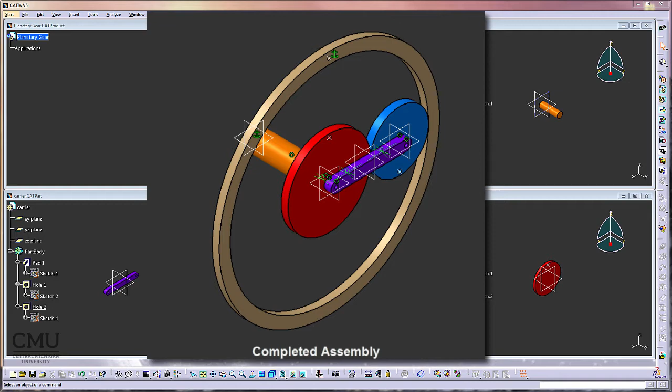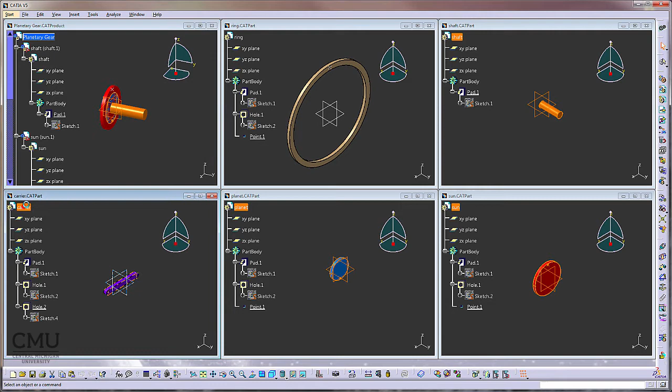the shaft, which will be the major axis for the sun rotations. Then I'm going to start adding other parts as well: sun, planet, carrier, and ring.

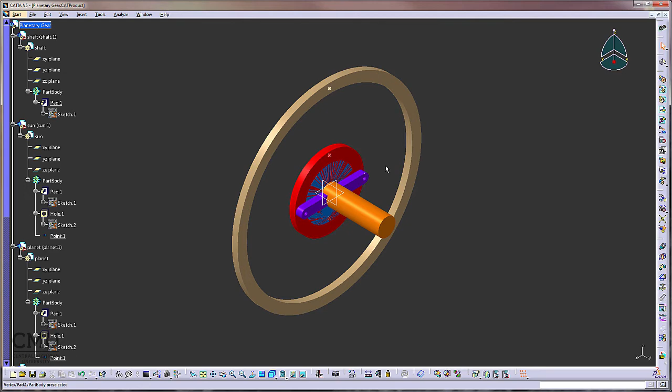Alright, to see a better view, I'm going to keep this angle. So I'm going to send the axis a little back, and fix the ring. The ring will actually represent the internal gear. This side will be gear, and there will be sun and planet linked by the carrier, and I will send the axis to the back, so they line up at the back of the sun.

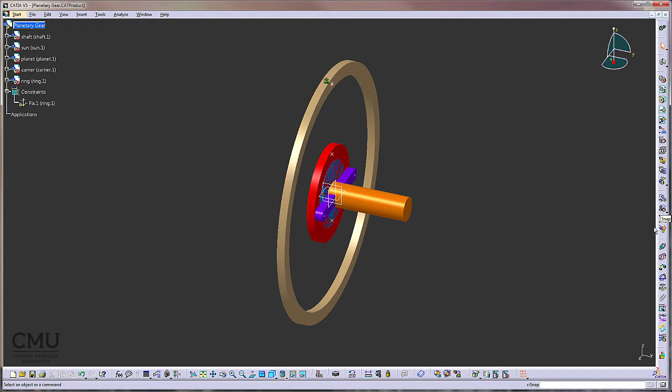So let me start with fixing the ring. Okay, ring is fixed, and I'm going to make this face coincident to this face.

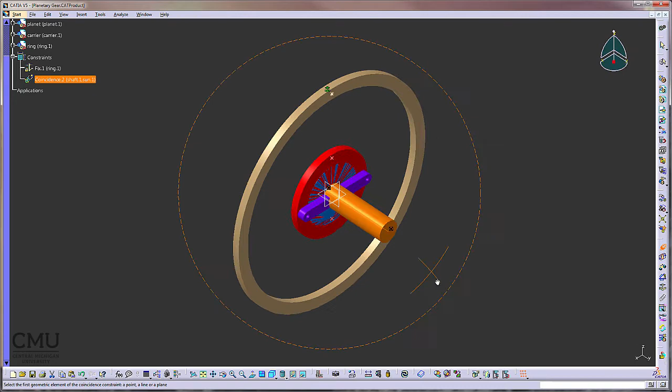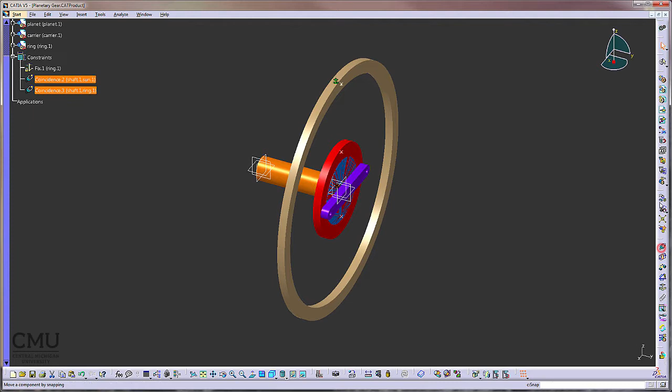Then I am going to make this face also line up with this face, so they are about the same level. If I update now, you can see they're not actually coincident between axes yet, so we'll fix that soon. Let me manipulate the planet up. We'll fix it later.

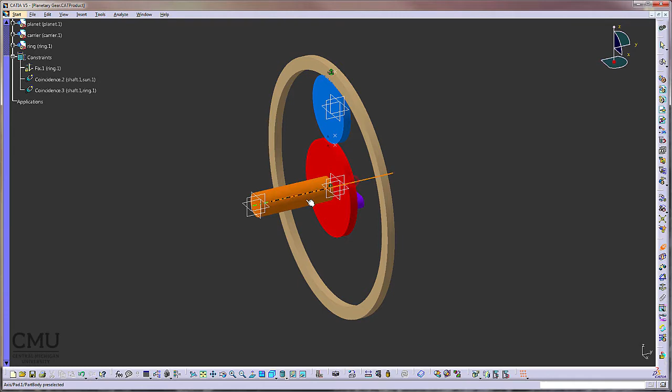So then, axis of sun, axis to axis. And now the sun should be able to rotate.

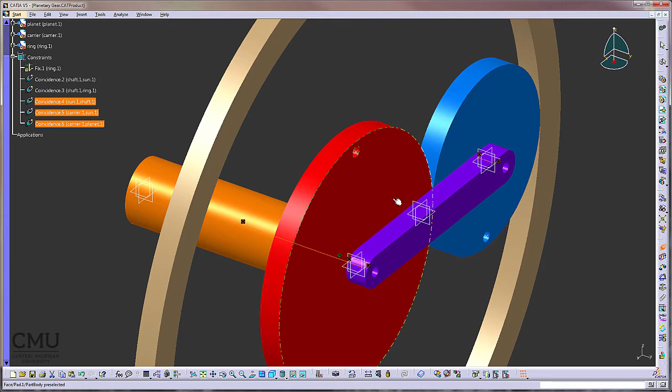Then for the sun and the carrier, I am going to make one axis align with the axis of the sun, and the other side of axis align with axis of the planet. Axis to axis, and axis to this axis. If I update it now, it's already in a pretty good position. I haven't added coincidence between those two yet, but the way the geometry was made, it's already lined up, so it should be good to go.

Alright, then let's jump into kinematics. So we're going to go to DMU kinematics.

As I mentioned, we're going to fix this ring and axis. In this moment, you don't have to have fixed parts in the assembly -- you can choose another part as your fixed part. So, new mechanism, then I'm going to fix the axis. The ring and axis should be in stationary positions, so the sun and planet rotate based on these two ratio differences. I'm going to put a rigid joint between axis and ring, so they're not going to go anywhere.

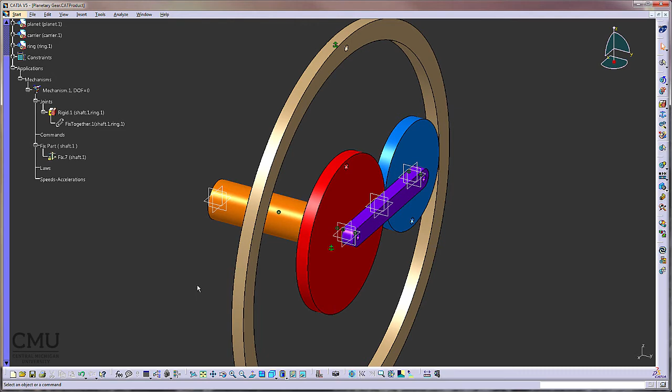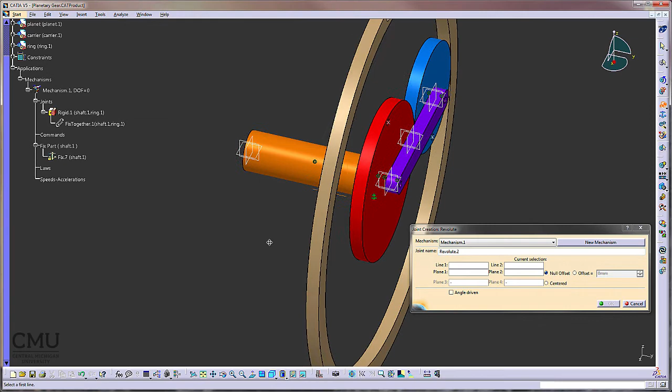Then we're going to have a very simple revolute joint here, between sun and axis. Then we're going to make a revolute joint between sun and carrier, and the same way a revolute joint between planet and carrier. So, revolute joint: axis, and plane -- I'll hide and use this plane.

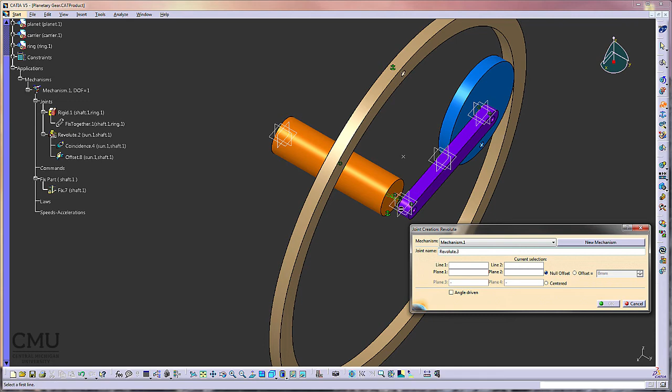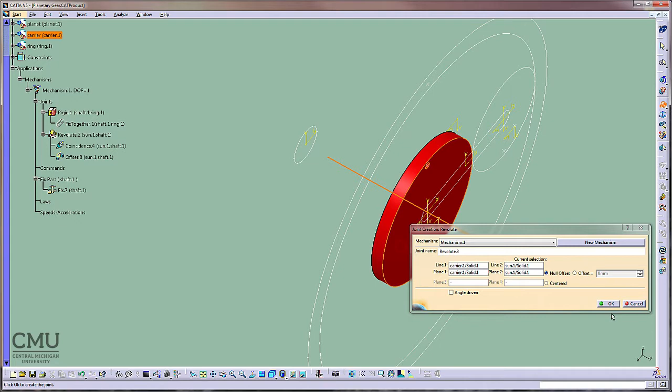Another one between carrier and sun. So axis -- I'm going to go to Hide/Show, axis, and plane, which will be the back of the carrier where it touches the sun. Then I can go to Hide/Show, and pick up the face where the carrier touches. Okay, so I can bring it back.

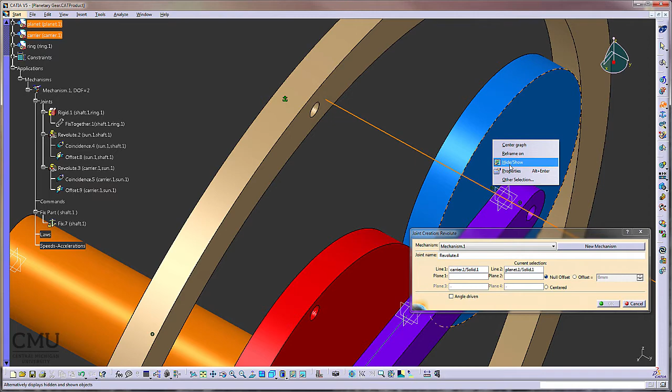And another revolute joint will be between planet and carrier. So axis, and I'm going to hide the plane, go to Hide/Show, and select this plane.

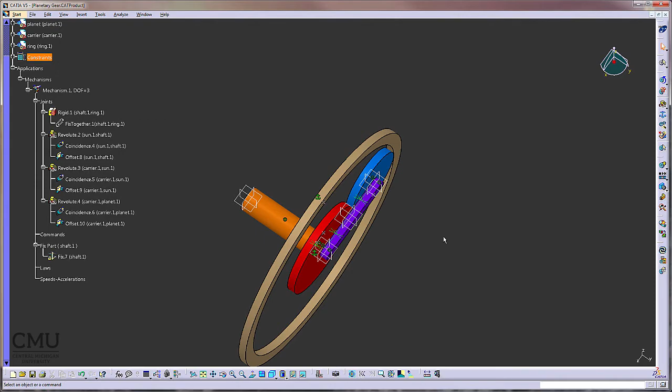So now, so far I've made 3 revolute joints. Again, the sun is rotating based on the axis, which is already fixed, and the ring was rigid, so it's not going to go anywhere. Another revolute joint between carrier and sun, and another revolute joint between carrier and planet. Now, with the assumption that all geometry is made properly, as you can see in the front view -- let me hide this one for you.

You have to make a single point contact between two curves if you want to create the roll curve joint, which is this one, the roll curve joint. We're going to use this joint to simulate a gear mechanism. Same way, the internal gear from the ring part and this planetary gear, the planet gear, will actually have a single point. So again, it's important to understand that to create a roll curve joint, you have to make a single contact point.

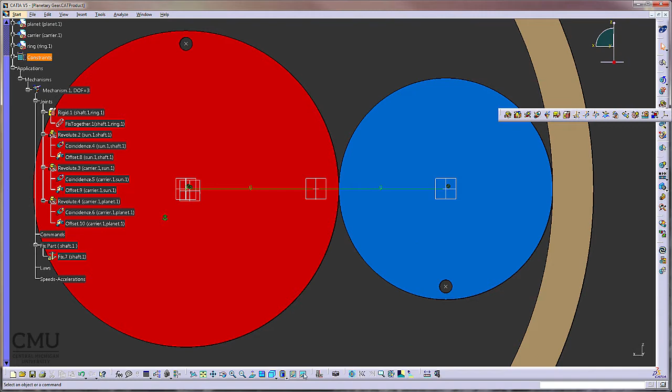So let me bring it back to the carrier. As you can see, based on the joints so far we have 3 degrees of freedom -- that makes sense: the sun is free to rotate, the carrier is free to rotate, the planet is free to rotate, and the rest is fixed. So we're going to make a relationship between this curve and this curve as a roll curve, and again this curve to this curve as a roll curve.

So let's find out what kind of degree of freedom we're going to have. Roll curve: first curve, sun; second curve, planet. Okay, so we have the first one, then the second one between planet and the internal gear. And now we have our degree of freedom.

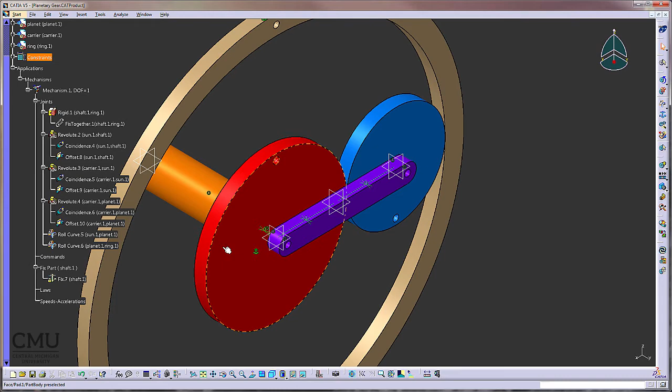With the assumption that the sun will be linked to a motor -- let's say it's a pinion -- then by rotating this, it should cause rotation of the planet, and that should cause rotation in orbit of this planet by the internal gear, which should cause the carrier to spin. So the axis of this carrier here will actually be the output, and the input will be rotation of the sun.

So our input, the actual command, will be the revolute joint of our sun based on the shaft. We're going to make it angle-driven, and rotate a perfect 360 degrees. But as you can see, because of diameter differences between planet and sun and planet and internal gear, there will be dramatic changes. So let me rotate it about 4 times, so 4 multiplied by 360 degrees -- the sun will rotate 4 times. Then we're going to find out how many rotations the planet will make, and how many rotations the carrier will actually make.

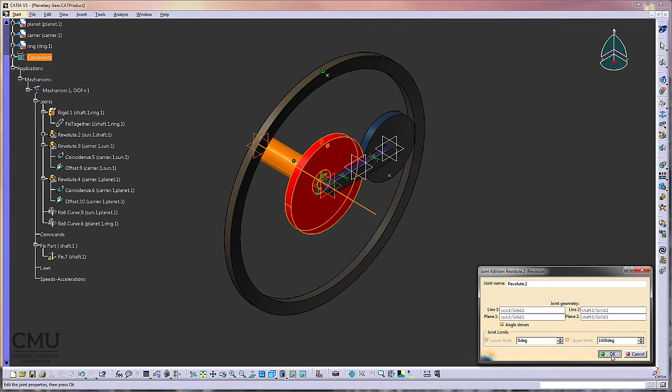So as soon as I say okay, the system, this mechanism, can be simulated right away. Let's see the mechanism -- 4 times the rotation of the sun. Then you can see the planet is rotating, and due to that, you can see the carrier is rotating as well. Okay, so insert.

So if I get rewind, there we go. So the carrier is making a little over 1 revolution for this full rotation of the sun.

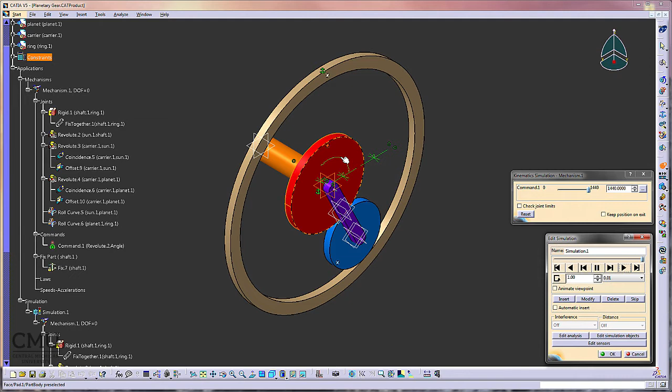Keep in mind, if you now put a law for the mechanism, if we spin that at, let's say, 10 RPM, then 10 multiply by 1 minute per revolution, 1 revolution, that is going to be RPM. Or you can say 360 degrees divided by 1 minute. It will again be 10 RPM in the case. Same thing, then I can add the kinematic time so that we have the same units for both lines.

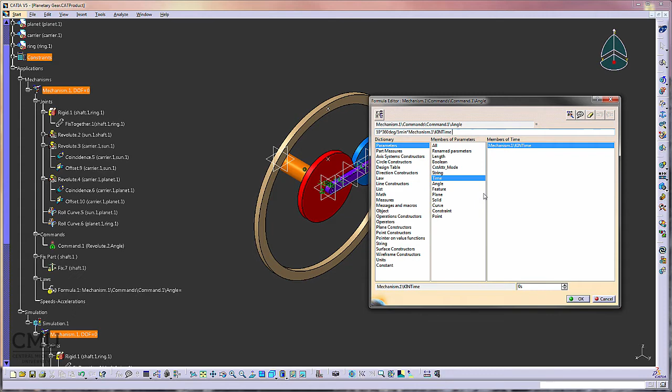Then say OK, so 10 RPM, the sun will rotate at 10 RPM over speed, and let's find out what kind of speed we will get for the carrier.

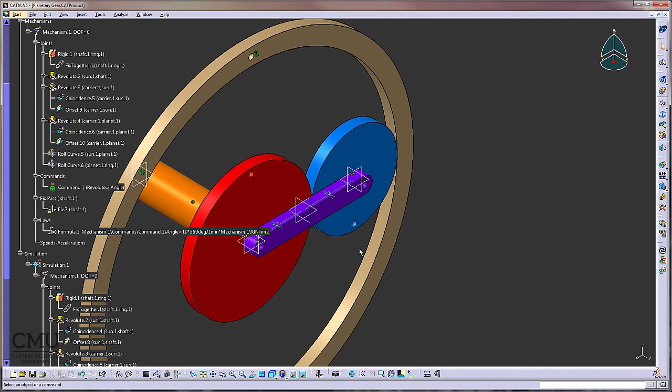So we're gonna add a sensor on the sun and on the carrier here, right there, and also add the planet. But one thing I'd like to mention is the axis we're checking the rotation of the planet shouldn't be based on the main axis. It should be based on its own axis in that case. So keep that in mind.

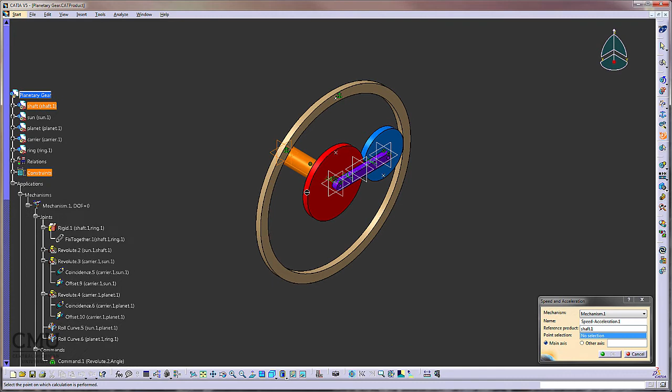So we're gonna add a sensor for the sun. The base reference will be, let's say, the shaft, which is a fixed one. Then for point of selection, we're gonna use the center origin point of the sun from the sketch in this case. There we go. So we're gonna keep checking based on the main axis in this case.

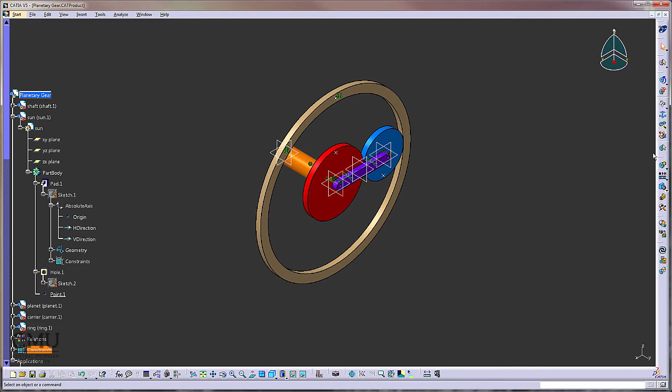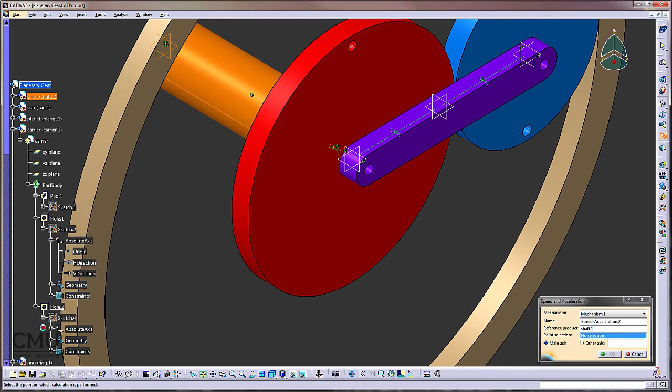First sensor is done. Second sensor will be added to the carrier right there. So we need to find out the speed of output. The shaft will be used as a reference. Then I need the axis to the origin, or if I had the reference point of the carrier—I don't think I have that point here. Since my origin is right here, I need to find the center of this hole. Is there a way we can find it? Again, the sensor position should be the center of this hole, which is actually my second hole in the carrier.

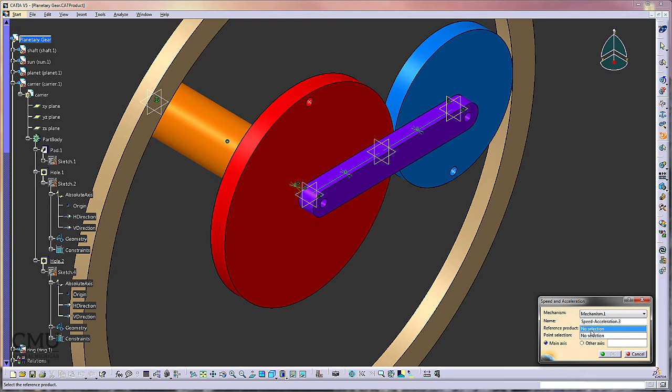So I'm going to use that so I can track the rotation. Same thing, another sensor goes to the planet. The sensor reference will be—that's the major point here. Now our reference is not the axis anymore because the planet will make a move, but I want to see based on this axis how quickly the planet is moving. So actually the reference will be the axis of this carrier. So with that fixed carrier, as the carrier moves, the planet moves, so then the point we are going to track and find out will be the center of our planet. So that's the difference, so be careful with that.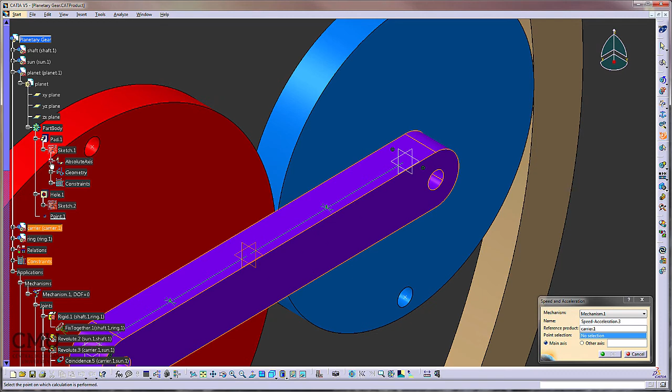Planet, oh, there we go. It's the center of this planet. Here's the origin. Okay, so I just put the sensor on the planet, but it's going to be based on the carrier. Since the carrier and planet are moving together, I'll be able to see the actual rotation based on the carrier's y-axis in this case.

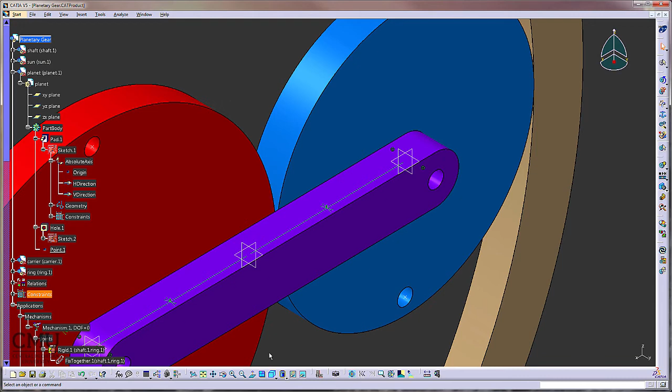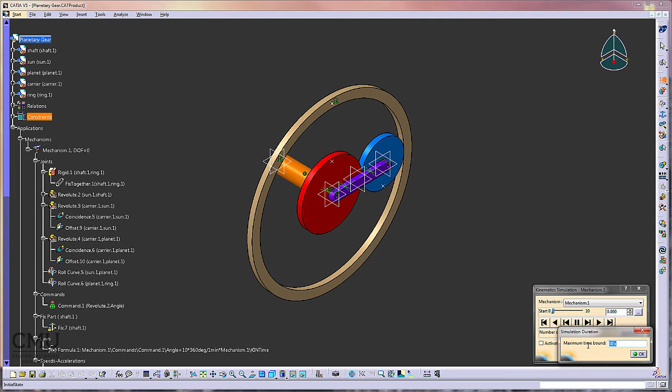All right, so I think it is ready to go. Then we'll rotate with the law, which is 10 RPM. It's going to be 10 times 360 degrees divided by 1 minute. Then how long? Well, within a minute, it will again be 10 RPM. So if I say it's going to be 1 minute, then I will be able to rotate 10 times, right? So I'm gonna make it 1 minute, which is 60 seconds.

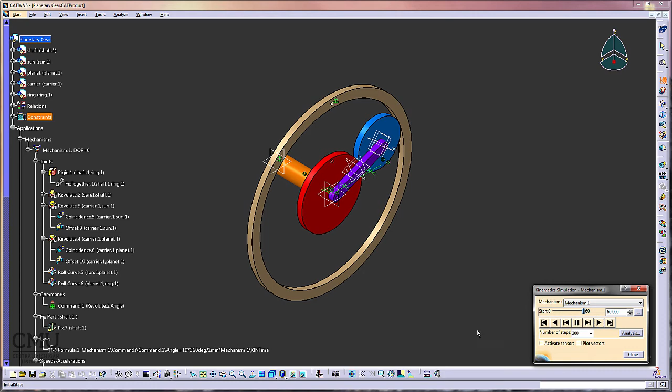There we go. So if I run, that's the speed of the sun within a minute. You're rotating 10 times. Then you can see the planet itself is rotating, and they're causing movement, then it will cause movement over the carrier's rotation. So that's good. Then I'm gonna activate the sensor.

And what we are looking for right now here is the axis, the rotation in the y-axis. In this case, you can see it for the sun, right, since the reference is right here. And same thing for the carrier, then the planet, but the related axis is not the main axis—actually the axis of the carrier is actually rotating. It will be good to have an additional axis here. By adding the axis in part design, you can actually pick up those axes instead of the main axis system.

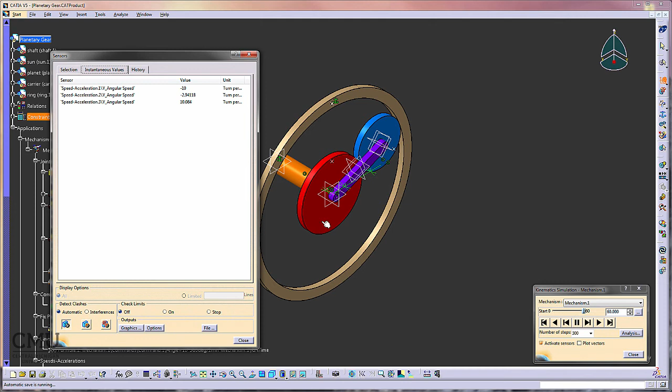In this case, so as an example, if I'm tracking sensor one which you added at the sun, I'm gonna see the angular speed of the sun. Then I'm gonna see the angular speed of the y-axis. There we go, of the second sensor, and the last sensor again, angular speed. There we go. There I got the 3 separate angular speeds, and we can compare what kind of speed we are achieving with the 10 RPM of the sun and the planet and carrier.

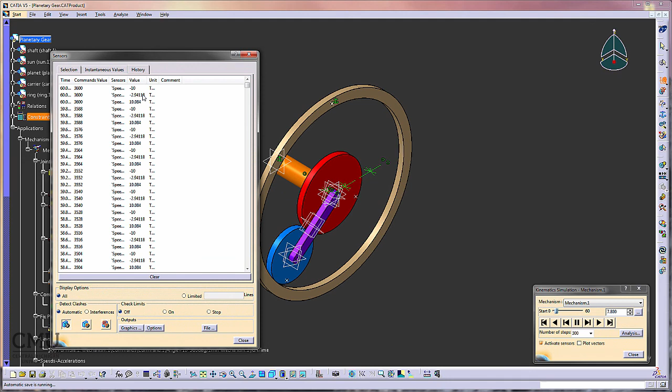Under the history, so if I start rotating, getting data, immediately you can see it. So the sun is rotating at 10 RPM. Then our carrier, which is the second one, is 2.94, less than 3. Then now we're getting another angle for the planet. In this moment, I'm not sure it's getting the proper angle with the difference between those two, and here 10.084 is right. I think we need to confirm that by adding one more axis in the part. Maybe we can confirm that later.

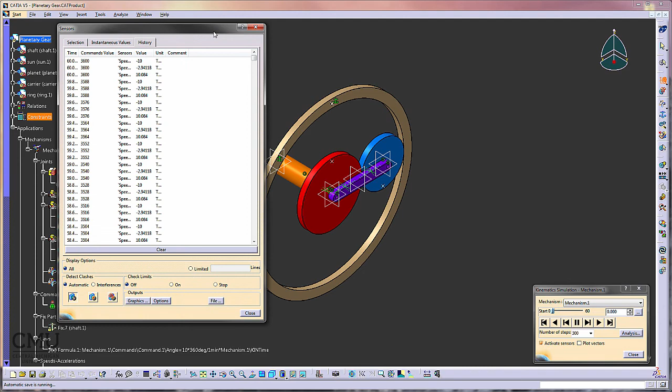So the point of this simulation was utilizing the roll curve to simulate this gear mechanism, but the internal gear was actually simulated with the roll curve. You don't have to really stick with the gear joint and the kinematics. Well, that concludes our tutorial.